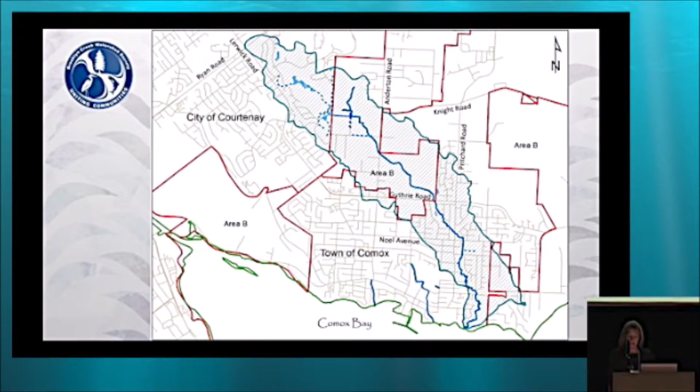I just wanted to do a shout out that there are, in the audience today, staff from Courtenay and also from the Comox Valley Regional District. So we've been happy recipients of all sorts of attention.

We didn't ask for it, but in 2018, we received an award called the Keeping It Living Award, presented by Comox Valley Project Watershed to local stewardship groups for the work that they've done. We received it for the work we do in terms of restoring and protecting the watershed, as just one of the many nonprofit societies doing so in the Comox Estuary.

Also, as you know, Brooklyn Creek was featured in an Ecological Accounting Process. Brooklyn Creek supports many fish—we have coho smolts in the upper left, little sticklebacks on the right, and also cutthroat trout shown lower down.

Spawning in the stream are chum salmon and also coho salmon. Those of you that know lake fisheries know that coho salmon spawn in the streams, and then the fry reside in the stream for one year before they out-migrate as smolts. So the habitat within the stream is important.

So the Town of Comox undertook this channel enhancement project between 2005 and 2017 on the lower reaches of the Brooklyn Creek. It's contained in a gully, so it's a nice park area. Their goals were to decrease the risk of channel destabilization, increase productivity and survival of the coho and resident trout, and to improve trails and public safety qualities.

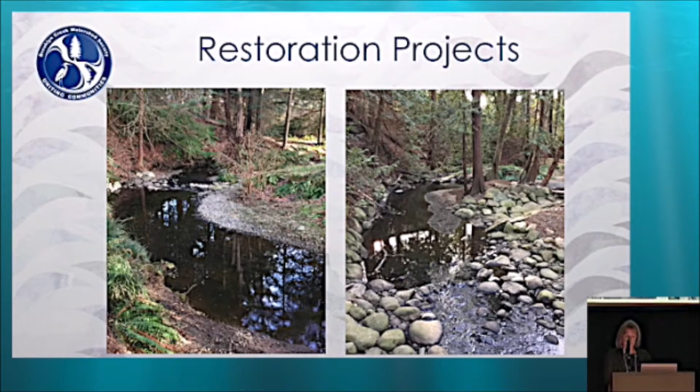Brooklyn Creek Watershed Society is able to access funding for enhancement work on the stream and riparian areas. We coordinate with volunteers to work and to increase the public awareness of the value of Brooklyn Creek as a natural asset.

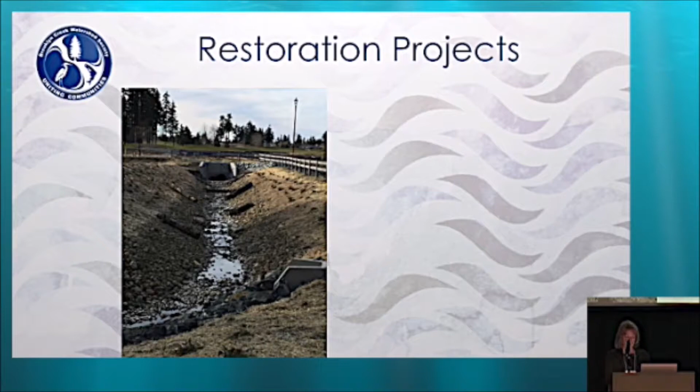There's a couple ways in which stream modification can occur. This is a straight section of the stream in the upper section, and there's been some habitat work done. There's gravel in the bottom, check. There's large woody debris along the stream banks, check. There's some riparian vegetation, check. So that should be pretty good for fish. But as we know, there's different ways in which this can be done.

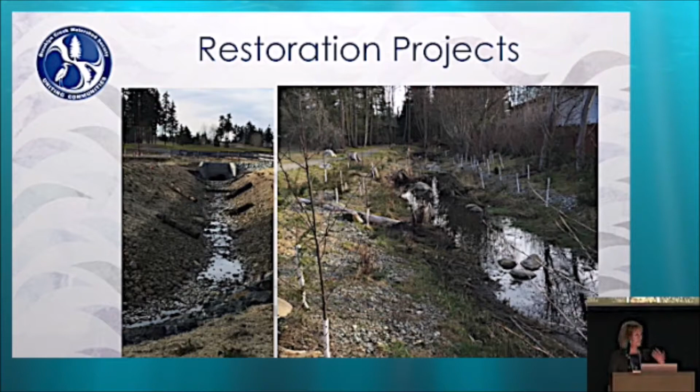This is another stretch of Brooklyn Creek. It's also a straight stretch in another area, but it also has gravel in the bottom, check. It has large woody debris on the stream banks, check. And it has riparian vegetation. But it also has some meanders in the stream, and some benches to create pools and riffles to allow for aeration of the stream. So a little bit different. There are ways in which to make the stream less of an eyesore and more of an asset.

We also had the tremendous cooperation of the park staff to do the work. In addition, we had many local businesses who would provide in-kind contributions, maybe doubling our order of what we purchased, so that we were able to do the works that we wanted to do. This particular illustration just shows a gravel slinger delivering the gravel into the stream so that we didn't have to haul it by wheelbarrow from the truck.

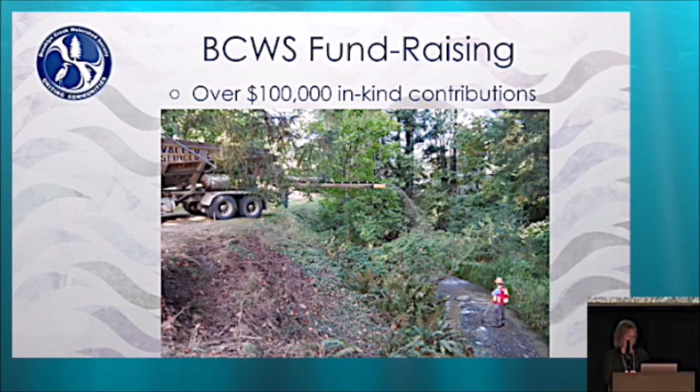Some of the things that we can do, as I said, is the fundraising. Another thing volunteers can do is recruit and engage other volunteers. Over the years, we've done a variety of different activities. We have a list of about 70 volunteers willing to come out per day, and we don't want to work them more than maybe 4 hours at a time. On a typical day in planting, you can have about 20 volunteers plant about 400 trees and shrubs. They typically do this work after the major construction work has occurred, in the late summer.

Another activity that we do is gravel nourishment. Because the stream is in an urban watershed, there's little opportunity for natural gravel nourishment, and both trout and salmon require it for spawning. So we have added gravel at different times to assist that, and we get a lot of cooperation from some private landowners as well to gain access to the stream.

There's also invasive species removal that volunteers can do. There's lots to choose from: English ivy, lamium, giant hogweed, yellow iris. You get the idea.

Another thing that we do with volunteers, and we're actually starting it in a couple of weeks, is we set up a smolt fence every spring and have it operational until about mid-June. This will be our 10th year recording the smolts. Now, it isn't entirely accurate, we do try to collect as many of the smolts as we can and count them through. We've had as few as 200 and as many as almost 4,000 smolts exiting the stream.

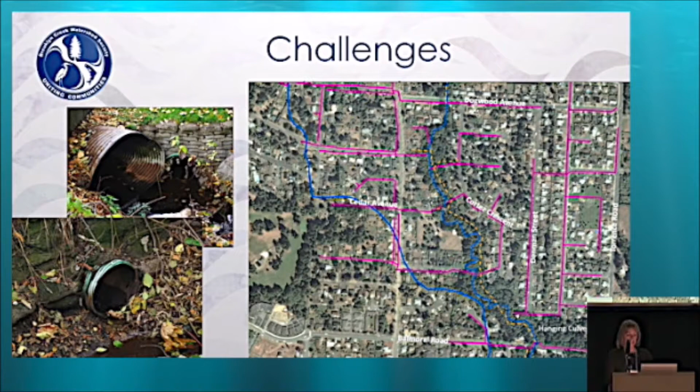There's also the challenge that a lot of the creek is on private lands, so what private individuals do on their lands is something we're hoping to approach best through education and awareness, making people aware of the asset they have in their own backyard.

There are also challenges in the headwaters region, as with most streams, where you always want to make sure there's consistent water flow. We don't oppose any type of development, but we encourage that development be done in a way that would still allow water to reach the stream.

We do have some concerns. In this illustration on the right-hand side, it shows a roadway, but underneath is a culvert that's about 330 meters long, and that's where Brooklyn Creek is. That was installed in 2012, so it wasn't done many years ago — it was done fairly recently.

If you look at the valuation Tim mentioned earlier, this is for water conveyance — at 330 meters times $2,700 a meter, it maybe suggests a potential value there.

As I said, Brooklyn Creek is a small society. We don't own any land, so we like to work cooperatively with people who do, or have access to it. We're very fortunate to have a great relationship with the Town of Comox, sharing a vision of protecting the stream as a natural asset, and we look forward to working with other local governments in the area to achieve similar goals.

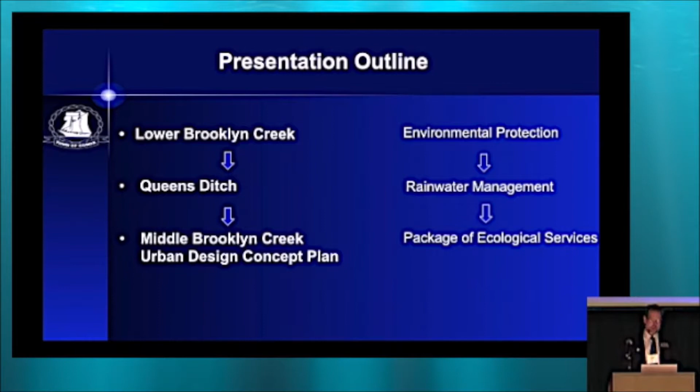What you'll notice as I go through the presentation is there's a progression. Lower Brooklyn Creek is really about environmental protection. Queens Ditch is about rainwater management. And the urban design concept is really about a package of ecological services.

As you've heard, Lower Brooklyn Creek is really a good news story. We have a well-defined channel, one third of it's a ravine. As a result, yes, development did occur, but there are large areas of either natural land left beside the stream or land that was relatively undisturbed.

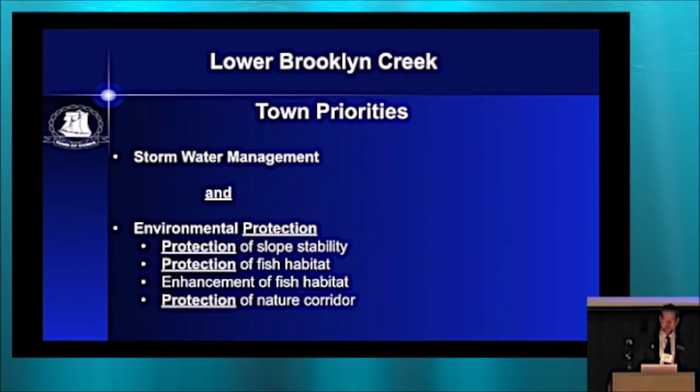Yes, it's used for stormwater management, with a very strong equal mandate on environmental protection. So there's something there worth saving that was highly valuable, and that protection ranged not just in terms of fish habitat and enhancement of fish habitat, but also given the ravine, steep slope stability, and more recently riparian area as a nature corridor.

Now let's move to a different watershed just to the northeast of Lower Brooklyn Creek: Queens Ditch and the Northeast Comox Stormwater Management Plan. This one's a bit of a different watershed. On the slides, between the two red arrows, that's Queens Ditch. It runs from DND CFB Comox out to the Strait of Georgia.

The stretch it runs through is primarily flatland, lowlands. The land to the north, the upper part of the slide, is CFB Comox, so there's quite a steep grade going up there. The lands to the west, the blue dot, are the Town of Comox. The majority of this basin is within Electoral Area B.

It's a former marsh, flat and low-lying. As a result, at mean high tides and during winter storms, there's widespread surface flooding. Queens Ditch was actually put in back in 1946 as a combined sanitary storm sewer for the base. Of course, that sanitary connection was slowly shut off.

Right now in Electoral Area B, there is no comprehensive stormwater management service, so it's a mix, a patchwork. You have the Ministry of Transportation and Infrastructure providing ditches with the sole purpose of draining the actual roads. You have private ditches draining private property, and then you have the DND Queens Ditch. A number of the private ditches actually connect into the DND ditch.

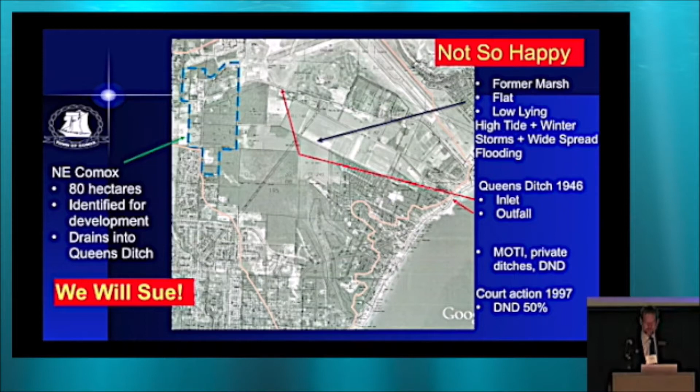In the first week, developers came in. One of the big things for any local government employee is that with the services you provide, you try to minimize liability exposure. So it didn't take Einstein to figure out: yes, there's been a lawsuit, we don't want to be sued. The developer's engineer, given the history of flooding, had to make sure there wasn't any increase in flood damage.

We pointed to a section of our subdivision bylaw that essentially said you can't just assume that because a ditch or a pipe is there, you can connect into it and that it has the capacity. You have to determine the capacity, and if it doesn't have the capacity to service your development, you have to come up with an alternative engineering design.

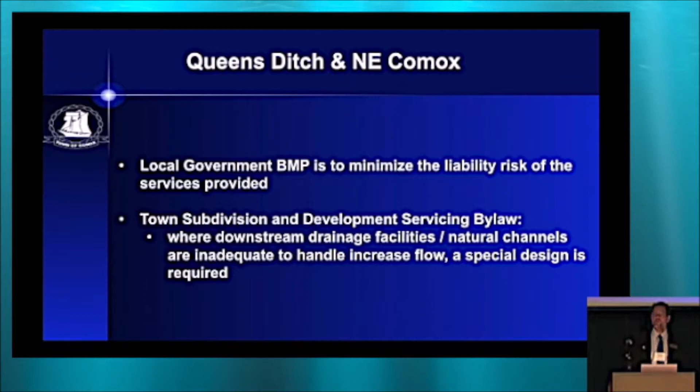So this information was relayed to the development's engineer. The development's engineer's first proposal came back with a detention pond connected to the Knight Road ditch, which connected directly to Queens Ditch. So one of the questions staff had was, well, that's really nice — so you found out that Queens Ditch actually has capacity to service your development? And the answer we got back was, well, we did look at Queens Ditch. The conversation then shifted to what size detention pond the town wanted.

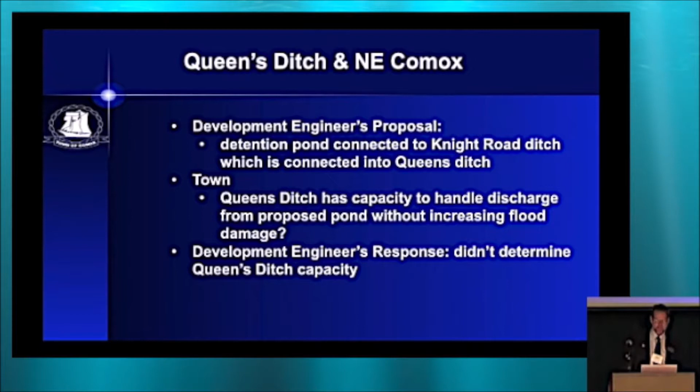You'd say the process stopped right there. In hindsight, it's not that surprising we reached that point, because the town doesn't have a large engineering firm — we've only had a useful engineer on staff for the last ten years, primarily for surface operations in public works. We took the stance that a consulting professional engineer was not only using things that met our standards or servicing standards, but that it was safe, that it would work, that nobody would have a problem with it. That's very misguided.

A consulting engineer, through the engineering association, is prohibited from setting a standard. They don't set safety. They'll argue with you if you say you want it to conform to a certain standard, but when push comes to shove and you ask, well, what's a safe standard, they'll say that's not our role. You set the level of safety, you set a quantitative standard, and we design to what you set.

The methodology at that time was solely focused on detention ponds. The idea is that when you have increased runoff from development, you take that runoff and put it into a detention pond, detaining the flows such that your post-development discharge rates match pre-development rates. Then you get into the question of what storm event you're matching — is it a 1 or 2 year event, a 10, 100, or higher — the number of years defining the size of the larger storm.

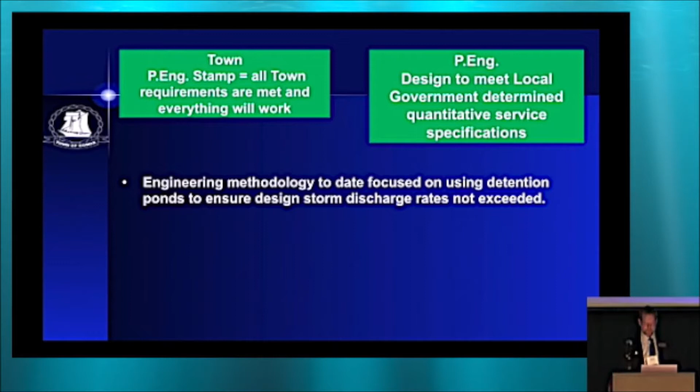So the action the town took was detailed terms of reference for stormwater management. The development group felt that they could undertake that stormwater management, so they hired a consulting engineer to do it in accordance with the terms of reference.

The terms of reference are very explicit. It says as a result of development, there can be no increase in downstream flood damage - that requires a P.Eng. stamp on that statement. No significant change in downslope groundwater - again requires a P.Eng. stamp. No negative impacts on downslope environmentally sensitive areas, fish habitat, as well as the agricultural lands downstream. That also requires a professional biologist certification stamp and a professional agronomist stamp.

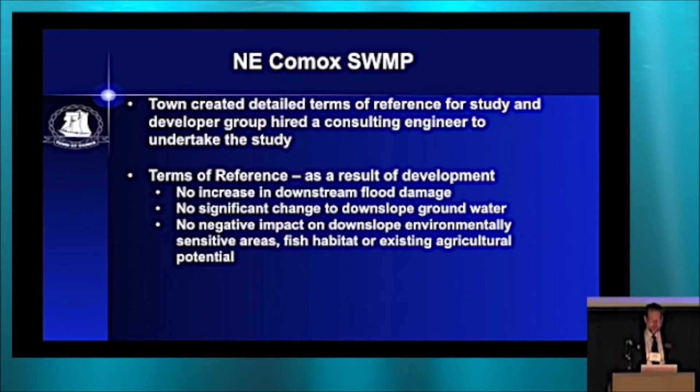The stormwater management plan came out in three phases, three reports. I'll give an outline of what each report did, and some of the things that really struck me as a layperson - I'm trained as a planner, not a municipal engineer. There were some things I assumed were given, that they were just doing automatically, which to my surprise was not the case.

So the first report was to find out how much rain is falling in that watershed and where it's going. Typically what happens is they take a design storm event on a representative or aggregate watershed and use that data - it's a hypothetical situation. In this case, they were required to identify a watershed that had the same rainfall characteristics and topography as the Queens Ditch, that had climatic data showing past rainfall, and also had flow data.

So what they actually got was 42-year hourly rainfall data for the watershed that was used. We also required that they assume 100% forest cover as pre-development conditions, as opposed to whatever the conditions were at the time the study started.

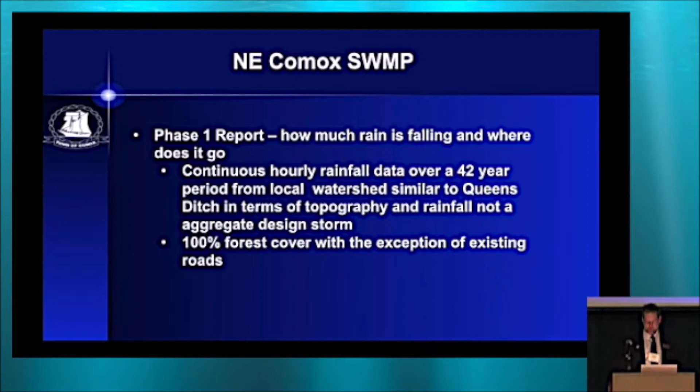The second part of the study would be determining if the land was developed in accordance with the official community plan, what would be the impact on stormwater, and then what would be the infiltration targets and detention targets to mitigate any impact on downslope lands.

Again, even though we had the data on an hourly basis, we had to push to make sure they did the modeling on an hourly basis, on a continuous basis, all the way up to a 1-in-100-year storm event, as opposed to just modeling a 1-in-10 and then a 1-in-100. Because there's a huge variation between those two - you can post can be pre on those two areas, and it's not automatic that all the storms in between post is going to be pre.

There's also a requirement that they include climate change, so climate change is factored in.

Phase 3 is the detailed specifications, telling the engineers when they're looking at infiltration galleries how to size them, how to build them, what the inlet's going to look like - same for the retention ponds. There is a requirement that all infiltration galleries and retention ponds have to be on town land.

So they're owned and operated by the town, and the real reason for this is there is no plan B. If the development goes in and these infiltration galleries go in, there is no secondary pipe so that if things don't work the way they're supposed to, the overflow can go somewhere else. We would have to rip up roads, which is going to be prohibitively expensive.

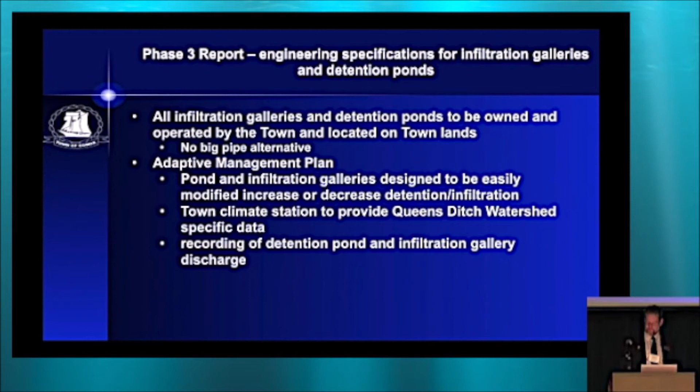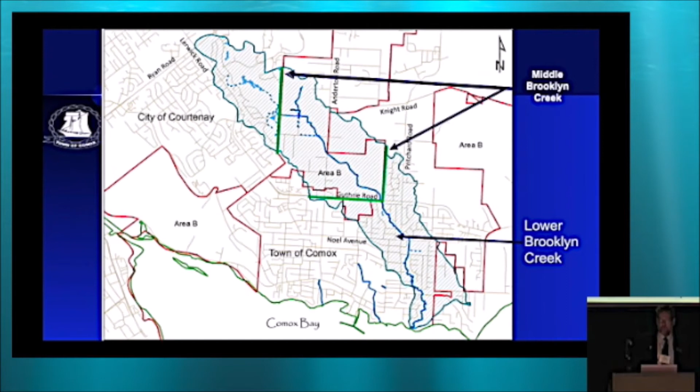We were just finishing up this project, and then we started getting into the urban design for the Anderton corridor in the middle of Brooklyn Creek. So the slide you've seen before, the middle of Brooklyn Creek, it's an electoral area B between the two lines right there. Our corridor plan is approximately 150 hectares in the gold area, and part of the creek definitely runs through it.

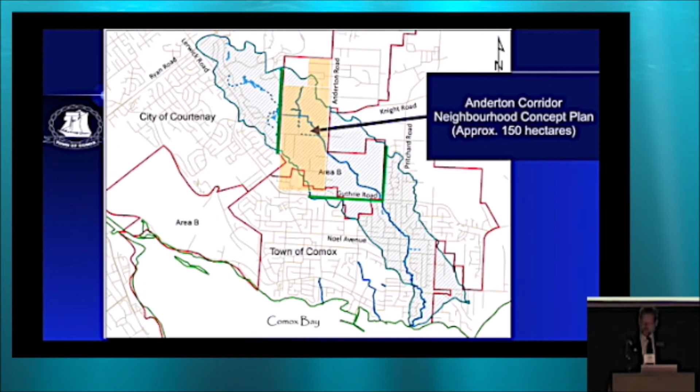So we figured, okay fine, we're doing the Northeast Comox Stormwater Management Plan. It seems to be well received, so it's a nice template. We started the engineers working on it for the Anderton corridor, said give us the designs, where the detention ponds are, the sizes, the infiltration galleries. Then we're going to overlay roads, then overlay land use. The regional strategy requires relatively high densities compared to past developments, and off we go.

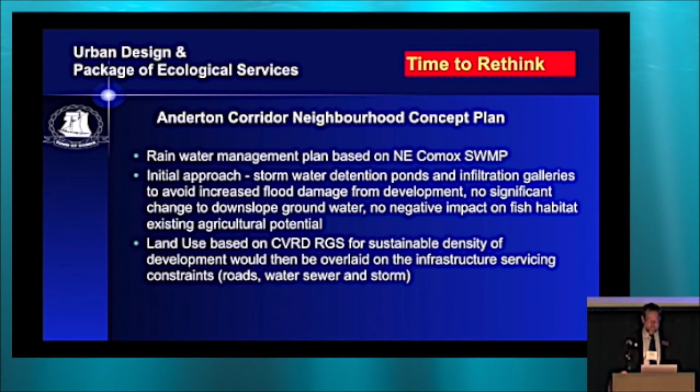That was all going quite fine until Tim Pringle. We were working with Tim, ongoing conversation, that's all really nice. He releases the report, and we read it, and the two sentences that really struck us were: the package of ecological services concept refers to the combined range of uses desired by the community. Thus, a strategic plan that supports this diversity will appear worthwhile to the greatest number of interested parties.

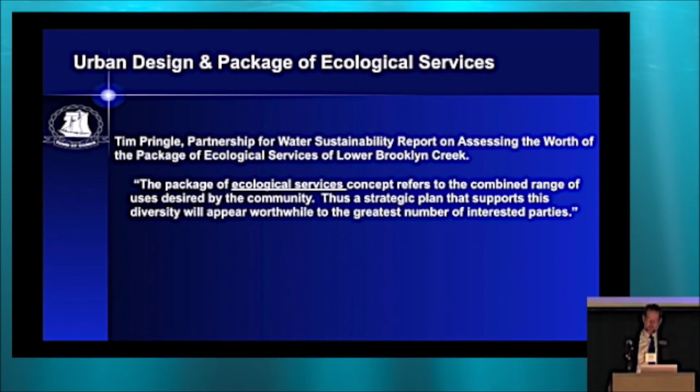And by ecological services, at that time we realized ecological services weren't an add-on, they were core services. Environmental protection is not an add-on, it's mandated by the province for fish habitat protection. Active and passive recreation - almost every municipality has parks, has rec centers, so it's a core service. Stormwater, along with water, sewer, roads, take up the bulk of the municipal budget.

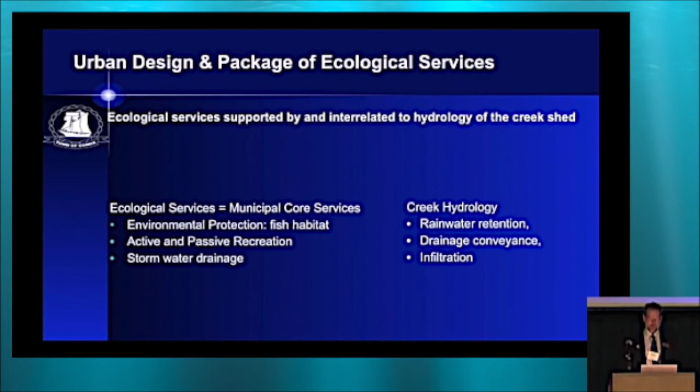So once it starts translating mentally into our minds that they're a core service, we start looking at it differently - okay, if we're going to have to provide these bread and butter core services in this community, how can we do it better? Given the second sentence, the idea that the strategic plan that provides diversity in the services is going to get the most amount of support.

And anybody who's been a planner knows that when you're sitting in a room designing a plan openly for hours, one of the things you really, really want to do is make sure you try to get something that people are going to like, so that they're going to support it. Nothing like coming up with a really bad plan and going to a public hearing.

So we rethought it, and we stopped work on the stormwater management plan, and we changed the focus to this idea of the package of ecological services and how we can get the best package for that neighborhood - so the best core service delivered, in another sense.

What that meant: we redesigned where the parkland and school locations are going to be. Parkland, school, great big green open spaces - if we stick them, or if we even have a stream running through a park, it's a higher amenity than one that doesn't. So why wouldn't we put them together?

Same with our greenway alignment - actually get the people into the parks, get the people into the riparian areas, support riparian and fish enhancement works. In the upper areas here, Brooklyn Creek, the channel is actually fragmented, so what we're looking at there is creating one channel. That way we get more water, so we get more water in the summer, and we get the cooler water in the summer for fish habitat.